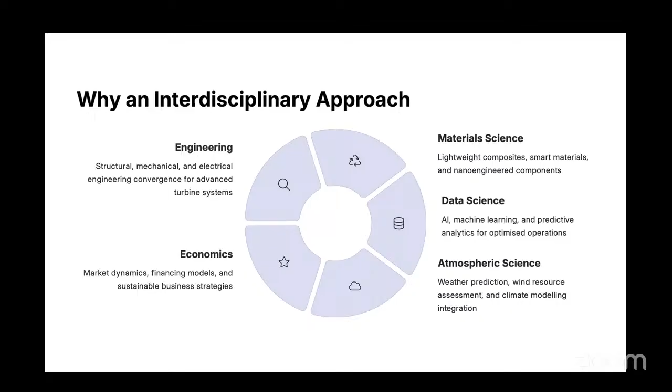What are the key challenges we are facing in wind technology? Even as wind energy scales, challenges remain. First, intermittency: wind does not blow consistently, creating stability issues for grids. Advanced forecasting is required, and storage systems are required to smooth the variability.

Second is material degradation. Blades face fatigue, erosion, and corrosion, leading to higher maintenance costs and downtime. Extending blade lifespan is essential for cost effectiveness. Third is grid integration, which becomes complex as wind penetration rises. Managing frequency, voltage, and balancing requires smarter electronics and system design.

The fourth is environmental impact, which persists, including bird strikes, noise, and visual effects. Mitigating measures such as smart siting and shutdown-on-demand radar systems are emerging. Finally, economic variability: while costs have fallen, capital intensity and financing remain hurdles, especially in developing markets.

Examples include California, where curtailment of renewables due to grid limitations is significant, and the North Sea, where saltwater corrosion challenges turbine durability. Recognizing these issues helps frame where innovation must focus.

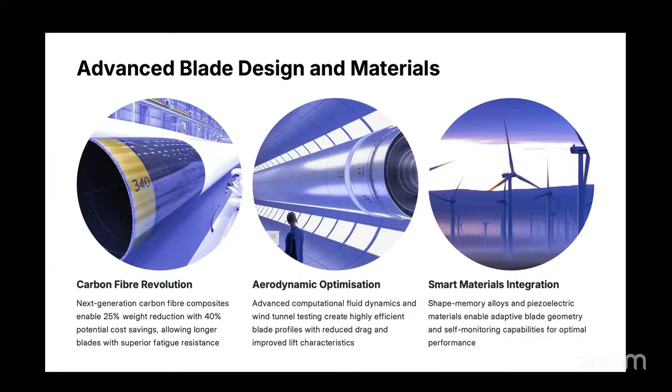And coming to smart materials, smart materials such as shape memory alloys and piezoelectrics allow the blade to adapt its geometry in real time, improving performance under variable winds. For a real world example, Siemens Gamesa is using recyclable blades which integrate advanced resins for sustainability, while General Electric's Haliade-X, the largest capacity wind turbine existing today, uses ultra long blades built from advanced composites.

So let's discuss carbon fiber composites and how they contribute to our wind turbine. Carbon fiber represents a revolution in blade technology because it makes wind turbine blades lighter. Compared to traditional glass fiber, carbon fiber allows a 25% weight reduction and also 40% cost saving over the blade's life cycle. This enables a longer, stiffer blade without requiring a proportional increase in tower size.

Sandia National Lab has demonstrated that carbon fiber composites significantly improve fatigue resistance, extending blade lifespan from 20 to over 30 years. Manufacturing advancements such as resin transfer molding reduce production time by over 40%. In practice, these blades are already in use. LM Wind Power's carbon fiber blades, equipped in General Electric's Haliade-X offshore turbines, are currently among the largest in the world, producing about 12 to 14 megawatts of power.

You can imagine the scale wind power has reached today. By lowering material fatigue and reducing cost by using carbon fibers, this becomes a commercially viable project. These advancements highlight how material science directly impacts both economics and performance in the wind sector.

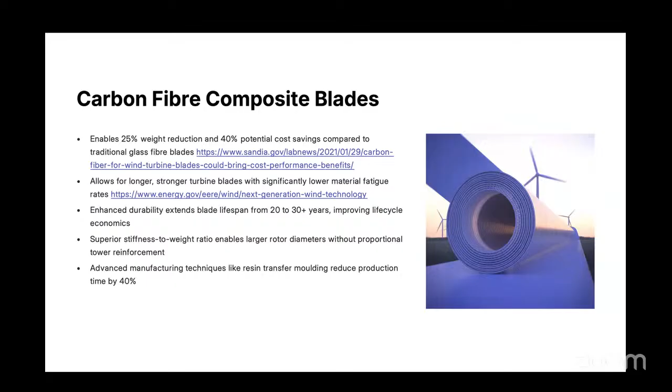So as I discussed before, biomimetic blade designs. Basically, the solution revolves around nature itself; we get inspired by nature. Nature has long been a source of inspiration for engineering. In wind energy, one example is the humpback whale flipper, a design with tubercles, bumpy ridges, which reduce drag and increase lift, and which can be applied to wind turbine blades. This design can improve power output by almost 16 to 30%. Sandia National Labs and multiple startups have tested prototypes with promising results.

And there's another concept of owl feather serrations, which are another inspiration. Owls fly silently because of fine serrations along their wings. So when applied to wind turbine blade trailing edges, these reduce noise by almost 3 to 5 decibels while maintaining aerodynamic efficiency. So Siemens Gamesa has experimented with such designs to reduce the community noise impacts.

So these nature-inspired solutions reduce the shortcomings of the wind turbine, such as noise and bird hitting, and increase the lift profile of the turbine blades. So another nature-inspired design is maple seed geometry, where the seed spins and auto-rotates as it falls. This has inspired small turbine designs with improved startups in low wind conditions, which is called the cut-in speed. And this could also help microgrid and distributed energy applications.

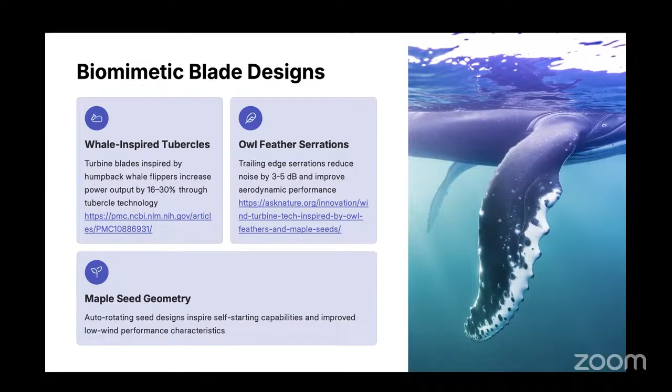Coming to vertical axis wind turbines. So vertical axis wind turbines, once sidelined, are regaining attention. Unlike horizontal axis wind turbines, vertical axis wind turbines capture wind from any direction, eliminating the need for a yaw mechanism and reducing the mechanical complexity. So this makes them especially suited for urban environments with turbulent wind patterns. So recent advancements have improved their efficiency.

This helical Savonius design now achieves 35% higher efficiency than older Darrieus configurations. So vertical axis wind turbines also operate more quietly and pose lower risk to bird populations. Basically the design does not include horizontally revolving blades. So this technology finds its application in urban areas where power can be generated, unlike horizontal axis wind turbines, which cannot be deployed in such areas. So this is a very simple approach which can be deployed in areas where bigger turbines cannot be deployed.

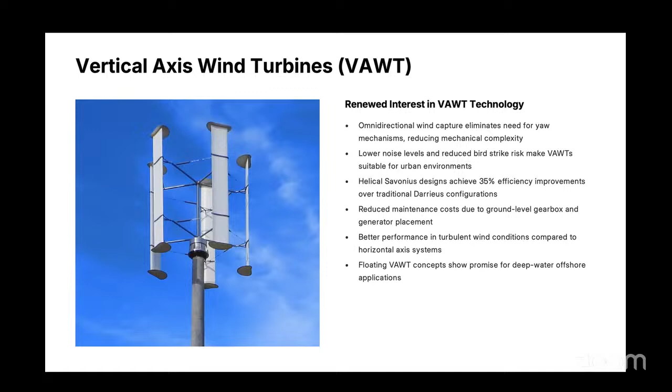Coming to floating offshore wind platforms. So offshore wind resources are immense, but many lie in water too deep for traditional fixed-bottom turbines. So floating platforms solve this challenge. We need not anchor the turbine to the bed of the sea using a concrete structure. They anchor to the bed of the sea using cables. So these are some of the floating offshore wind platforms which contribute to wind power generation. Why we are going offshore is because the wind is more powerful, stronger, and consistent in offshore regions. So this is a region we have to focus on.

So some of the semi-submersible platforms with 3-column designs are stable in harsh seas and borrow heavily from oil industry experience. Basically, the oil industries use their rigs on platforms in the sea, so they are very stable. Using that kind of approach, nowadays there are floating wind turbines, and tension leg platforms use taut mooring lines to minimize the motion. So basically, the waves are enabling the tension in the leg platform. What we are doing is moving the platform and correcting based on the tidal waves. And spar buoy concepts with deep cylindrical ballasts achieve stability through a lower center of gravity.

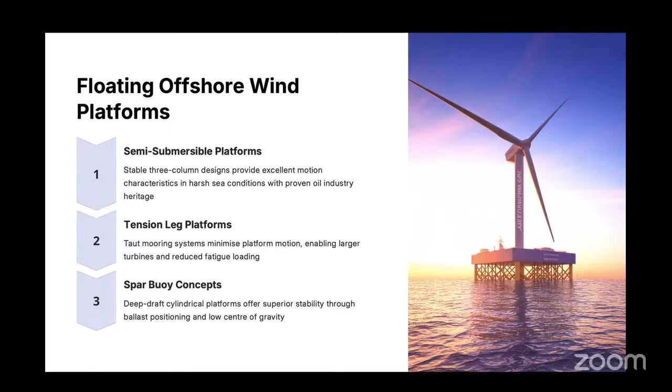So coming to a practical example, Equinor's Hywind in Scotland, the world's first floating wind farm, has been operational since 2017, delivering power to over 20,000 homes. Similarly, WindFloat Atlantic from Portugal has shown excellent performance in 100-meter deep waters.

So coming to smart turbine control systems. As turbines grow larger, smart control becomes essential for reliability and efficiency. So advanced sensors are required, which now monitor vibrations, blade stress, temperature, and wind conditions in real time. Data streams feed into the control system that optimizes the performance dynamically. And sophisticated algorithms adjust pitch, yaw, and rotational speed to maximize power capture while minimizing fatigue.

So another approach is predictive response systems, often powered by machine learning, which anticipate wind changes before they actually occur, adjusting the turbine settings proactively. For instance, General Electric's Haliade-X, which I discussed, the world's largest offshore wind turbine, also employs a sensor-rich platform that adapts pitch and yaw with remarkable precision. Similarly, Vestas is also integrating smart control algorithms to minimize structural stress while maximizing energy yields.

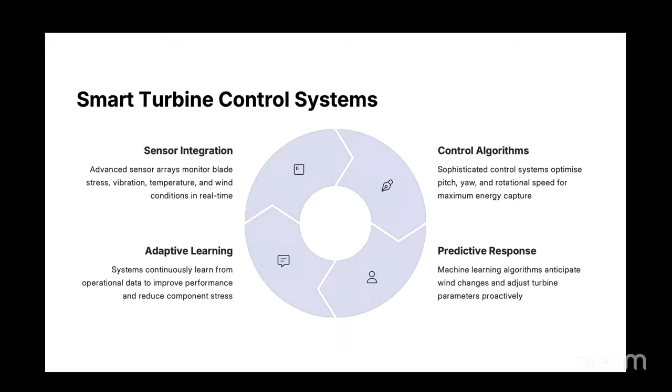So let's see the role of AI and machine learning integration in the wind power sector. Artificial intelligence is transforming wind energy. AI-driven systems improve operational efficiency by up to 20% through smarter controls. Machine learning algorithms enable predictive maintenance, cutting downtime by about 30%.

Neural networks process diverse data streams, wind speeds, vibrations, power output to continuously fine-tune the turbine performance. So deep learning models can even predict failures weeks in advance, enabling proactive repair. So we are getting a lot of data from these wind turbine sensors, and we can apply these deep learning models to even predict the faults which are yet to happen.

For example, Vestas uses an AI platform to forecast the maintenance needs across its global fleet, while Siemens Gamesa is also using AI for optimizing the blade pitch control. AI also improves forecasting accuracy, unlike the traditional approach, with energy production predictions which are now 15% more precise. In India, Tata Power has also piloted some AI systems to integrate wind forecasts with grid operation, reducing the curtailments.

So this integration turns wind farms into intelligent data-driven assets. As AI advances, it will be central not only to turbine optimization, but also to grid level management, ensuring renewable stability at scale.

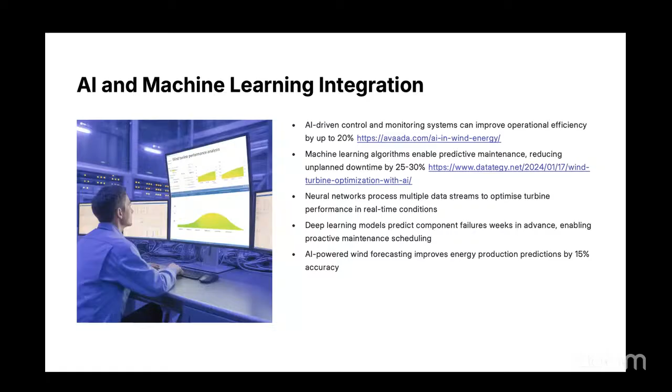Next, let's see how these predictive maintenance technologies are coming into the picture. Predictive maintenance is becoming a cornerstone of efficient wind operations. Nowadays, predictive maintenance is also getting into electric vehicles and every other equipment we see around us. There is a lot of data coming from the sensors, which is uploaded to the cloud and processed. So these AI models can predict well before the sensor or some device gets faulty. Condition monitoring systems use sensors to track vibration, temperature, and acoustics, detecting early signs of wear.

Data analytics evaluate historical trends to forecast optimal maintenance intervals, preventing costly failures. AI-optimized scheduling reduces cost by 20 to 35% while maximizing availability. Performance optimization tools extend component lifetime by identifying operational adjustments. For example, DNV GL is a company with a predictive maintenance platform, now widely used in Europe, which helps operators extend turbine availability beyond 98%.

In the US, NextEra Energy applies predictive analytics across its vast fleet to save millions annually in maintenance cost. So predictive maintenance is shifting the industry away from reactive repairs to proactive repair. Data-driven management reduces downtime, lowers cost, and ensures higher output over the turbine's lifetime.

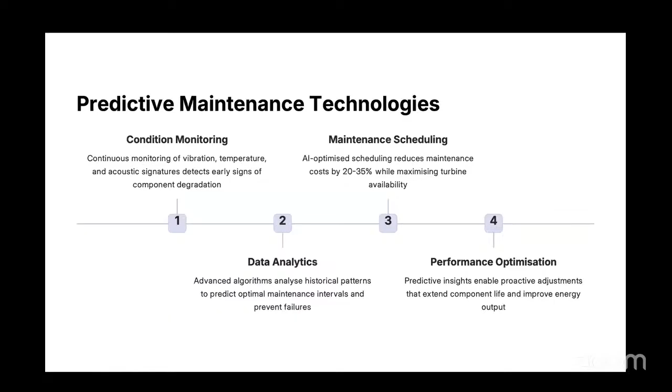Coming to advancements in power electronics. Power electronics is one of the backbones of wind turbines, which integrates them into modern grids. Wide bandgap semiconductors like silicon carbide and gallium nitride are enabling higher efficiency and compact converters. Nowadays, we have seen how compact mobile chargers have become, thanks to silicon carbide and gallium nitride based devices, wherein we are able to operate at higher switching frequency and reduce the component sizes.

Advanced converter topologies such as modular multi-level converters improve power quality and also reduce harmonics. And grid support functions, such as voltage support, frequency regulation, and fault ride-through, are increasingly embedded into the turbine electronics. For instance, Hitachi Energy and ABB are advancing SiC-based converters that reduce size as well as losses. Offshore projects in Germany have now deployed modular multi-level converters to stabilize the grid integration of large farms. These innovations ensure that as wind penetration grows, power electronics maintain grid stability while improving efficiency.

Let's now see what grid forming inverters are. Grid forming inverters are revolutionizing how renewables integrate with grids. They allow wind farms to behave like virtual synchronous generators, providing inertia and stability traditionally supplied by fossil fuel plants. Fault ride-through is a capability which ensures that turbines stay online during disturbances and improves resilience. There is one more concept, black start capability, which allows a wind farm to restart the grid after an outage. Once thought impossible for renewables, now it is possible.

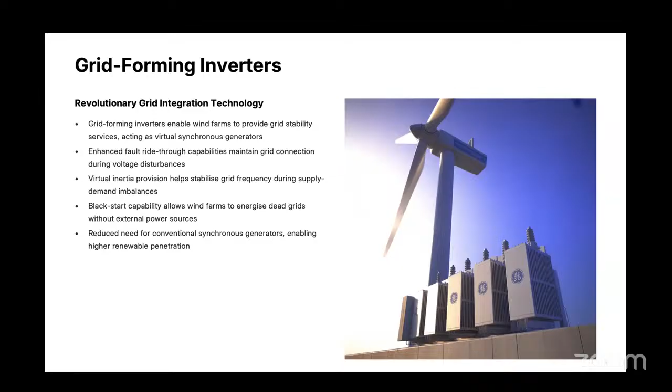Coming to modular turbine designs. Modularity simplifies turbine construction, transport, and maintenance. We'll just see how it will aid the construction, transport, and maintenance. Nowadays, the blades are segmented, so they can be assembled on the site, enabling ultra long blades without the logistic bottlenecks. We see these wind turbine blades going one after another on the highways.

You might have come across a convoy of many blades. As you see, this is a very challenging task to transport to the site. So segmented blades simplify the assembly, which can be done on the site itself. Next is prefabricated tower sections, which also reduce crane requirements and accelerate the installations.

Another segment which will aid this construction is modular drive trains, which allow for rapid replacement and upgrade during the turbine life cycle. So these are the three sectors which enable us to develop the wind turbine at the site itself.

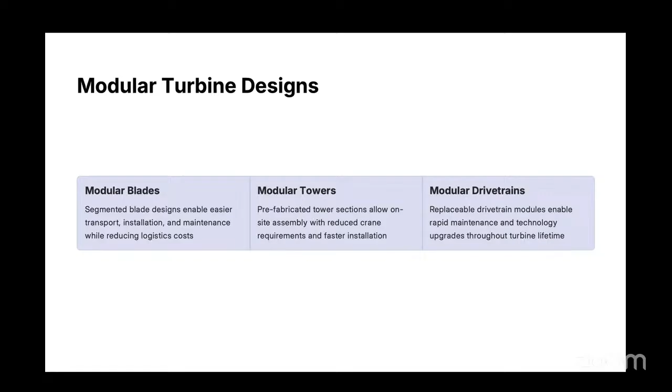Coming to ultra high capacity turbines, as I said, the turbines are reaching the tens of megawatt range. Modular turbines simplify turbine construction, transport, and maintenance, as I discussed earlier, and are able to achieve multi-megawatt capacity. Turbines are now reaching unprecedented scale. Current leaders include General Electric's Haliade-X and Vestas V236, which are rated for above 15 megawatt. You can imagine one turbine generating 15 megawatt of capacity.

This in turn gives us a cost advantage as well as powering many homes using a single turbine. These next generation prototypes are targeting about 20 megawatt with rotor diameters exceeding 280 meters. These turbines reduce cost per megawatt by nearly 50% as fewer units are needed to achieve large scale capacity. For example, a single Vestas V236 can power 20,000 European homes annually.

Offshore wind farms like Dogger Bank in the UK are deploying around 13 to 15 megawatt turbines, making it the world's largest offshore project. Scaling capacity is not just about size; it requires stronger materials, advanced logistics, and grid readiness. But ultra high capacity turbines are set to define the offshore future, lowering cost and maximizing power density.

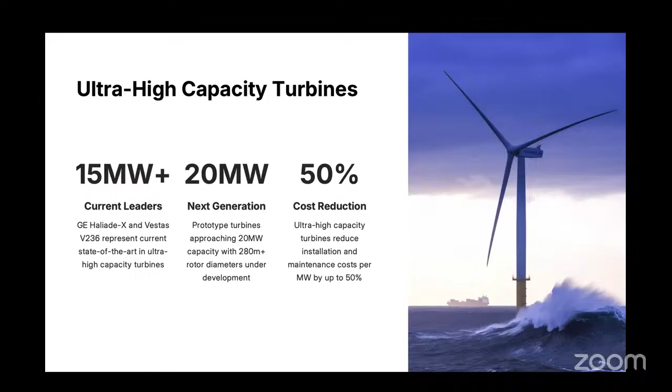High strength alloys like ultra tough steel and titanium composites are increasingly used in towers and drive trains to withstand harsh offshore environments. As I said, the opportunity offshore is huge because the wind speed is consistent and a lot stronger than onshore. So we need high strength alloys for fatigue resistance and carbon fiber blades to achieve more power output in offshore turbines.

And as you know, maintenance of offshore turbines is very difficult, so we have to choose materials which will last longer. Coming to smart materials, including shape memory alloys and self-healing polymers, which are cutting edge and under development. These can automatically adjust the structures or repair micro cracks, reducing downtime.

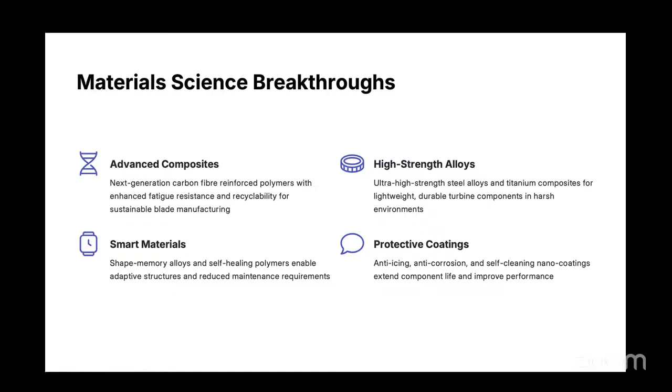Coming to aerodynamics and fluid dynamics advancements. Aerodynamics contributes a lot to power conversion efficiency. Aerodynamic research delivers higher efficiency and reduces fatigue. Large eddy simulation, a kind of model, provides detailed insight into turbulence around the rotor. Improvements in blade element momentum theory also increase performance prediction accuracy by up to 15%. Wake interaction modeling enables optimal wind farm layouts, boosting energy capture by almost 8 to 10%.

Wake interaction is nothing but the trail, you can say the shadow, of the wind turbine. When the wind crosses the wind turbine, it undergoes turbulence, and there is a fixed length of rotor diameters after which another turbine can be installed either behind it or on the crosswind. Optimizing this wake interaction will increase efficiency, and we can optimally lay out the installation of wind turbines on a wind farm.

So to maximize the output. And unsteady aerodynamic research, which will uncover how gusts and turbulence impact blade fatigue and noise. Bio-inspired flow control, such as micro vortex generators, which also reduces the drag and improves the lift.

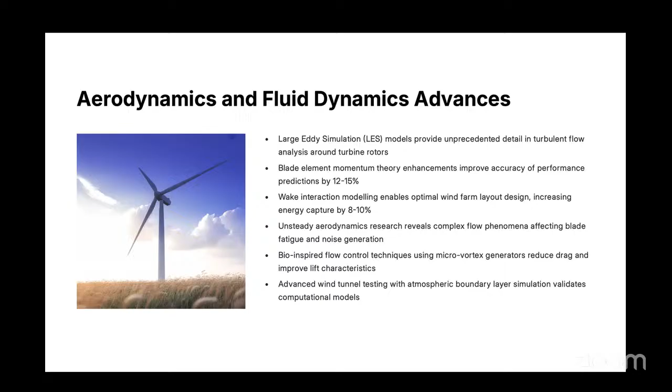Coming to structural engineering innovations. Structural engineering is very critical as turbines grow larger and larger. Advanced foundation systems like suction and gravity based designs are being developed to suit varied seabeds. So these are very important and very crucial for the offshore turbines. And dynamic response control, including tuned mass dampers and active systems, which reduces the vibration in the towers.

Next is load mitigation strategies, such as individual blade pitch control, which will cut extreme loads by up to 20%, and structural health monitoring, which will have embedded sensors which track the stresses on the blades and structure in real time. So, for example, offshore wind farms in the UK are now employing suction foundations for rapid installation. And as I told, General Electric's Haliade-X, which is the world's largest capacity wind turbine, integrates individual pitch control to reduce the stress on the blade.

So traditionally, we used to have pitch control on all of the three blades by equal amount. So by having individual control over each blade, we can optimize the power output better and be resilient to wind gusts. So these innovations extend lifetime, reduce the cost and improve the safety while ensuring turbines remain resilient under extreme conditions.

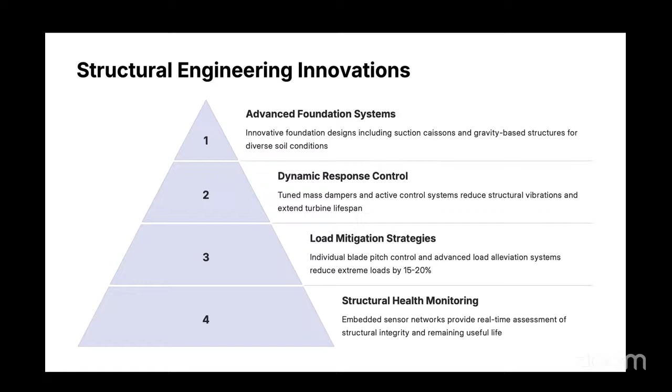Next is digital twin technologies. What do you mean by digital twin technologies? This is nothing but a virtual model which is developed inside the laboratory to evaluate how a wind turbine will perform in the targeted environment. So digital twins are reshaping wind energy operations. So a digital twin is a virtual model which updates in real time with sensor data.

So high fidelity simulations predict performance under varying conditions, and predictive analysis forecasts failures before they actually occur and optimizes the maintenance schedule. Virtual testing also allows operators to trial control strategies without physical prototypes. So, for example, Siemens Gamesa uses digital twins for fleet-wide monitoring, while NREL, which I quoted before, also developed physics-informed twins to analyze the structural fatigue. So, digital twins enhance lifecycle management, cutting cost and maximizing the uptime. They turn turbines into continuously optimized assets.

Let's just see how IoT and sensor integration benefit the wind turbine technology. So wind turbines now act as an Internet of Things. So basically, it is equipped with a lot of sensors and also internet. So a lot of AI models can make use of this data on the go and optimize the technology. So this sensor integration also uses distributed sensor networks, which can monitor vibrations, temperatures, and strain, and also environmental conditions. So edge computing processes data locally, enabling fast decision making, and cloud analytics provide fleet-wide insights and optimizations.

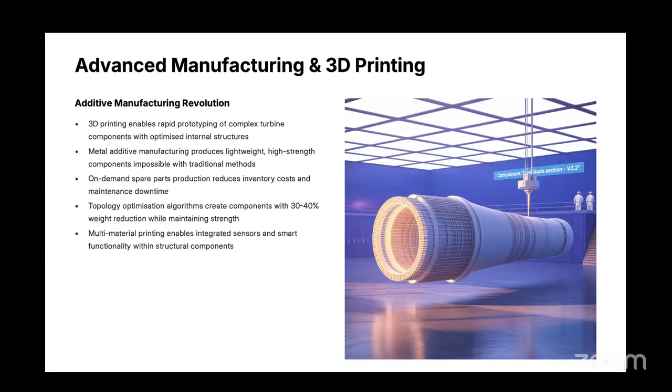Let's see what is the application of nanotechnology in the wind turbine industry. Nanotechnology enhances strength, efficiency, and resilience.

For offshore turbines, we use coatings which reduce icing and formation of corrosion. Nanocomposite materials like carbon nanotube reinforced polymers provide exceptional strength to weight ratios for the blades.

Nanostructured coating reduces ice, prevents erosion and corrosion, and provides self-cleaning surfaces. Once coated with nanostructured coating, it becomes very easy to clean these turbines offshore.

Energy harvesting nanostructures such as piezoelectric materials convert vibration into power for sensors, which is being tested and deployed in offshore applications.

As a case example, researchers at Fraunhofer Institute are also testing nano coatings that reduce blade icing and load in cold climates. Such innovations ensure turbines remain efficient even under harsh weather.

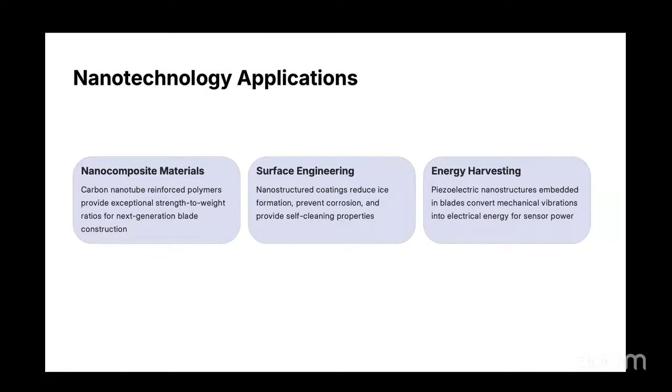Nanotechnology bridges material science and performance, unlocking new frontiers in durability.

Now let's discuss acoustic engineering solutions. Noise is a significant community concern in the wind turbine industry. Advanced acoustic measurements identify the sources of aerodynamic and mechanical noise, and acoustic designs such as serrated trailing edges reduce noise by 3 to 5 decibels.

Nature-inspired designs are also being tested, which reduce the noise level coming out of the wind turbine. Active noise control systems adaptively cancel unwanted sound, just like the true wireless headsets we use, which cancel noise.

For instance, Siemens Gamesa is using trailing edge serrations to cut blade noise, while researchers in Germany are piloting active noise cancellation for smaller turbines.

Reducing noise makes turbines more acceptable near these communities, supporting wider adoption.

Noise is also a concern in installations because wind turbines produce a lot of noise. If a community is in the vicinity of these wind turbine farms, it is very disturbing to them. So one sector where work is happening is acoustic engineering to mitigate these noises.

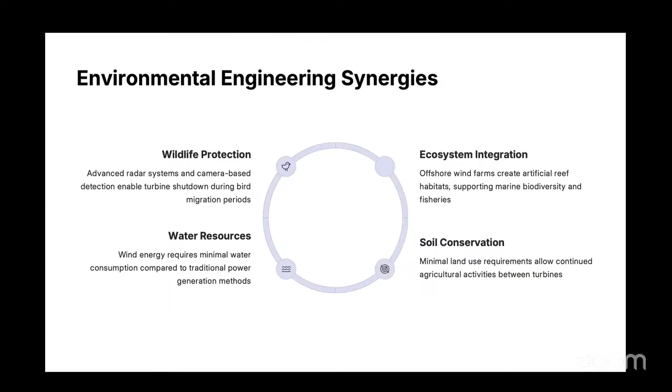Let's see how atmospheric science integrates into the development of wind turbines. Atmospheric science improves forecasting and performance.

High resolution weather models now achieve 95% accuracy for 24-hour forecasts. Mesoscale models provide resource assessment at 1 kilometer resolution, and LiDAR technology profiles wind up to 200 meters in height, optimizing control, and boundary layer research informs wind farm layouts to minimize turbulent losses.

For a real world example, offshore farms in the North Sea rely on LiDAR for accurate forecasting in turbine alignment. Integrating atmospheric science ensures turbines operate at maximum efficiency while reducing grid uncertainties.

Let's see how data analytics and big data come into the picture. AI is also contributing more nowadays in terms of prediction and optimization of power output from wind turbines, and the Internet of Things is enabling this big move in the industry.

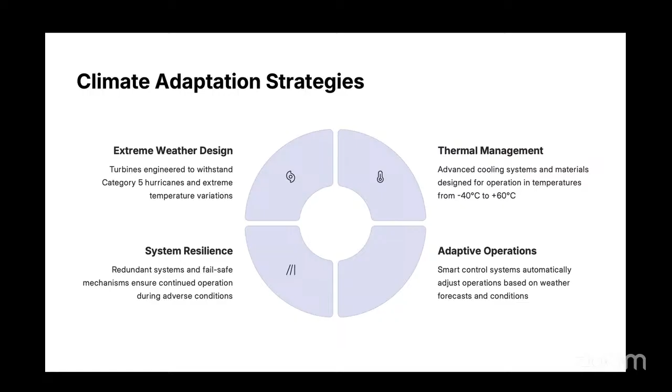Let's discuss extreme weather resilience. Resilience strategies are increasingly embedded in turbine designs. Pre-storm preparations: systems automate protective measures 48 to 78 hours in advance. Next is storm survival mode, which locks the rotor and adjusts structure to reduce damage. Typically a wind turbine locks its rotor and reduces the lift produced by the blades by adjusting its pitch.

Next is the post-storm recovery system, which uses drones and sensors for rapid condition assessments and damage mitigation through advanced materials, reducing repair costs. In Japan, typhoon-resistant turbines are being piloted with reinforced blades and towers. Offshore, companies like Equinor integrate storm survival protocols into floating platforms. These measures reduce downtime, cut repair costs, and protect infrastructure. Extreme weather is inevitable; we cannot control the weather at all, but resilience ensures continued operation throughout.

Let's see how wind resource mapping affects wind turbine technology. Accurate resource mapping is the foundation of wind turbine projects. Satellite-based measurement provides global data sets with about 1 kilometer resolution. Ground-based LiDAR systems capture local wind up to 300 meters. Nowadays, machine learning models combine these data sets for better prediction accuracy, with high resolution modeling accounting for terrain and micro scale patterns. For example, India's National Institute of Wind Energy has developed wind atlases to guide project sitings. Similarly, the Global Wind Atlas, developed by the World Bank, provides open access data worldwide. Advanced mapping reduces investment risk, ensures optimal siting, and maximizes project yields.

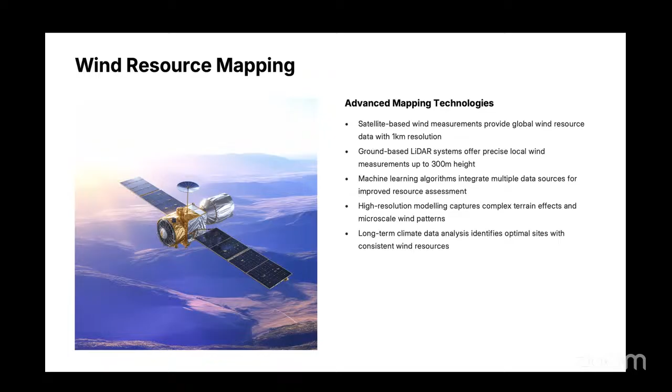So let's see how we can integrate this weather forecast. Weather forecasting is integral to wind turbine operation. Real-time data ingestion, combined with satellites, radars, and ground stations. Ensemble forecasting uses multiple models to provide probabilistic predictions. Power production forecasting converts weather data into expected generation.

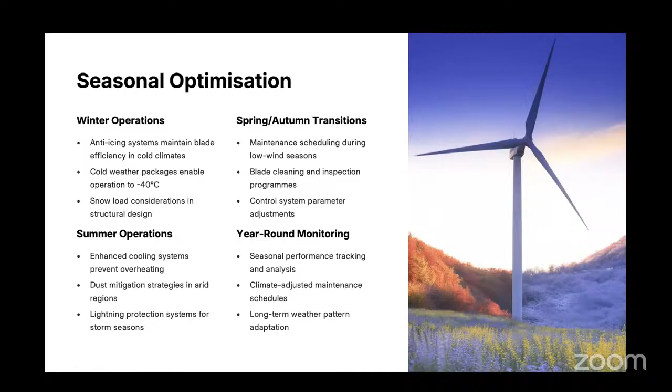Let's see how multi-hazard design works in wind infrastructure. Wind turbines must withstand multiple hazards. Seismic resistance is achieved by base isolation and flexible foundations, and hurricane survivability relies on aerodynamic reinforcement. As I said, a variable pitch system is used for individual blades. Coming to flood resilience, which involves elevating electrical components and sealing enclosures.

For example, Japan has higher seismic activity, so their offshore projects integrate seismic and typhoon resilience, while in the US, Gulf Coast turbines are designed for storm surge protection. So multi-hazard designs ensure these turbines are safe and reliable even in high-risk regions.

Let's see infrastructure hardening. Hardening infrastructure improves resilience and safety. This includes enhanced foundations, like deep caisson, which provide stability in extreme seas, reinforced towers with high-strength steel, which reduce fatigue and vibrations, protected electronics that resist electromagnetic pulses and surges, and backup systems that provide emergency power and communication.

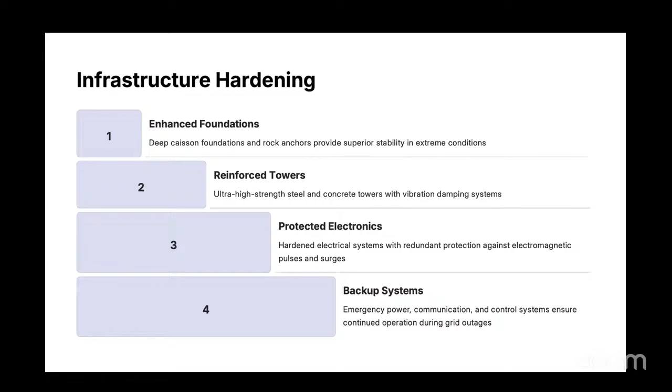Let's see what the emergency response systems would be if a hazard or event is detected. Emergency response capabilities are critical for modern wind farms, including automated shutdown systems that can stop the turbine within seconds when dangerous conditions are detected, and emergency communication networks that maintain connectivity during disasters, ensuring coordination with grid operators and local services.

Drone-based assessment can quickly survey wind turbine conditions after storms, reducing the time and risk of manual inspection. Drone-based approaches are taking off very quickly nowadays. Even blade inspection and crack detection in towers are done through drones, unlike manual assessment. Next is remote monitoring platforms, which enable off-site management during a crisis.

For example, Ørsted is a company that integrates drones into inspection across its offshore portfolio, and also uses real-time monitoring centers in Spain to manage these emergency events. With climate risk rising, emergency response systems also protect these assets, safeguard personnel, and enable rapid recovery of these systems.

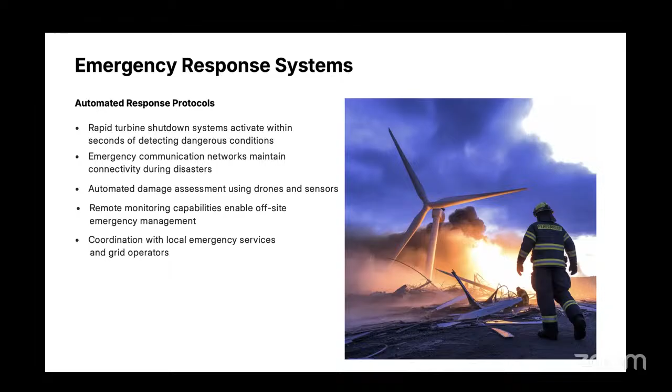Let's see how we can integrate climate modeling into wind turbine technology. Wind planning is increasingly integrated into global and regional climate models. IPCC scenarios guide long-term energy planning. IPCC is the Intergovernmental Panel, an international body which guides how long-term energy can be planned.

Next is regional downscaling, which produces site-specific projections for wind speeds and weather extremes. Next is extreme event analysis, which identifies risks like stronger storms and drought conditions. Next, uncertainty quantification, which ensures resilience even under multiple climate futures. For example, European utilities now use downscaled models to assess offshore wind viability under future climate conditions. Integrating such insights ensures investments remain robust across decades.

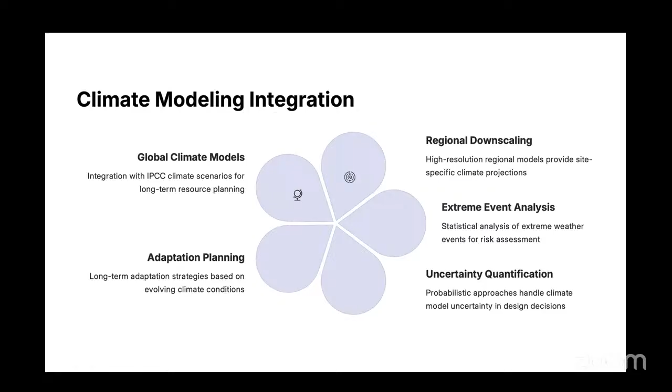So let's just see what is the risk assessment framework in wind turbines. Risk assessment ensures projects account for hazards and vulnerabilities of the wind turbines. The first step is hazard identification, which catalogs threats like storms, floods, and seismic events. Next is vulnerability assessment, which analyzes turbine and system weaknesses.

Next is probabilistic quantification, which combines hazard frequency with consequence severity, and mitigation strategies, which develop cost-effective countermeasures. For instance, offshore projects in Japan now employ seismic risk modeling before foundation design starts. So these frameworks ensure that developers make informed choices and minimize financial and operational risks.

Let's just see what the adaptation pathways are. Adaptation is not a one-time action, it evolves in stages. From 2025 to 2030, there is incremental improvement, such as anti-icing coatings, modular repairs, and better forecasting of wind data. In the 2030 to 2040 decade, we'll see deployment of advanced materials, predictive maintenance systems, and integrated hybrid renewables.

And in the following decade, 2040 to 2050, we'll see fully climate-adapted systems with revolutionary technologies like recyclable turbines and autonomous wind farms. For example, Denmark's energy agency has already mapped adaptation strategies through 2050, linking its innovation policies. So adaptation is a pathway which ensures resilience that keeps pace with climate change.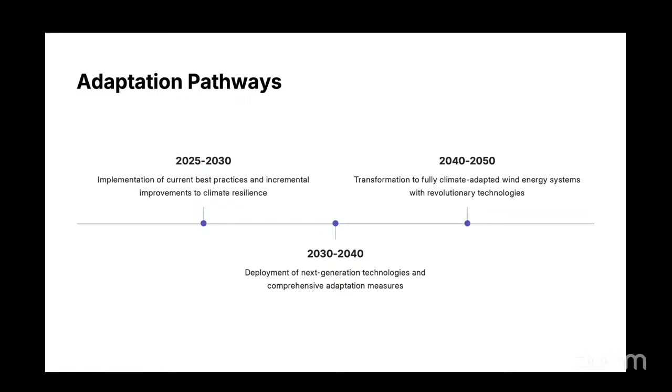Let's just see how we can integrate into a smart grid. Wind energy is increasingly supporting smart grids. Advanced metering enables real-time monitoring and demand management, and demand response systems balance supply and consumption dynamically. Next is grid services, such as voltage support and spinning reserves, which come directly from the wind farms themselves. Next is predictive control, which integrates forecasts into grid dispatch.

Denmark is a global leader. Wind regularly supplies more than 50% of its electricity while maintaining grid stability through smart integration. So this slide demonstrates how wind is not just energy generation, but an active grid participant.

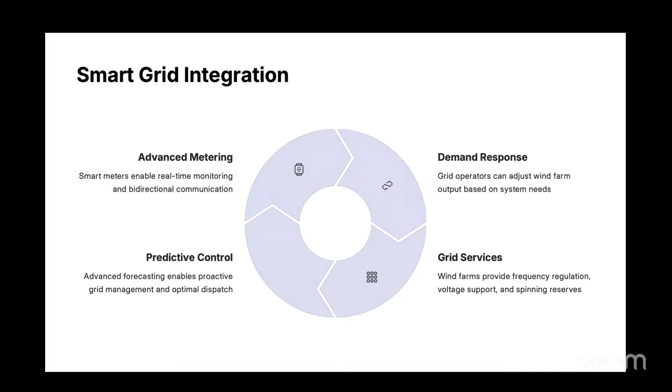Now we'll see the application in microgrids. Wind also powers resilient microgrids. Community microgrids provide local energy and security. These community microgrids are nothing but smaller turbines installed, let's say, in urban areas. Next, island nations like Hawaii and Mauritius reduce dependence on diesel with wind and solar storage systems. By integrating storage systems and using wind turbines, we can mitigate the diesel-powered generators which provide energy to the island nations.

Next are industrial facilities, which use microgrids to cut costs and boost reliability. Then military bases, which adopt wind-powered microgrids for operational independence. Nowadays, airborne wind turbines are also coming, which have no structures; they are kite-based wind turbines. They can be portable and can be deployed in places where wind energy is not accessible and installation is very difficult.

A real-world example: the Kodiak Islands in Alaska run largely on wind-hydro microgrids, reducing diesel imports dramatically. Microgrids highlight how wind energy supports both sustainability and resilience.

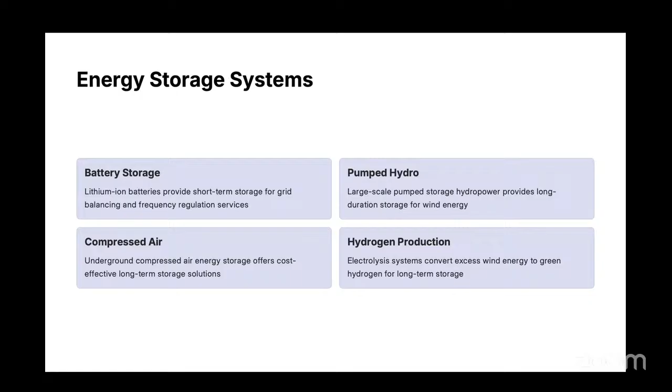And then there is green hydrogen, which enables seasonal storage and sector coupling. We convert water into hydrogen gas, store it, and convert it into electricity whenever it is needed. There is a European company developing a project which demonstrates wind-to-hydrogen at scale. And Hornsdale in Australia couples wind with Tesla batteries, as I discussed, for frequency stability. So storage ensures wind energy is firm and dispatchable, ready for 24/7 supply.

Let's see how grid stability solutions can be coming from wind technologies. Grid stability is essential as renewables expand, and frequency regulation is one of the main important components. In India, we have a one grid, one nation policy, wherein we have one grid which swings together. So frequency regulation is very important, which uses advanced inverters to provide synthetic inertia, and voltage support, which comes through reactive power control, and black start capability, which allows a farm to restart dead grids.

Hornsdale Power Reserve in Australia has shown how a renewable plus storage system can provide these grid services faster and more effectively than fossil plants. Even the fossil plants require a time period to start and supply power. So by having a wind turbine with a storage solution, we can start the grid instantly by using cutting edge technologies. So grid stability solutions redefine renewables from variable suppliers to grid stabilizers.

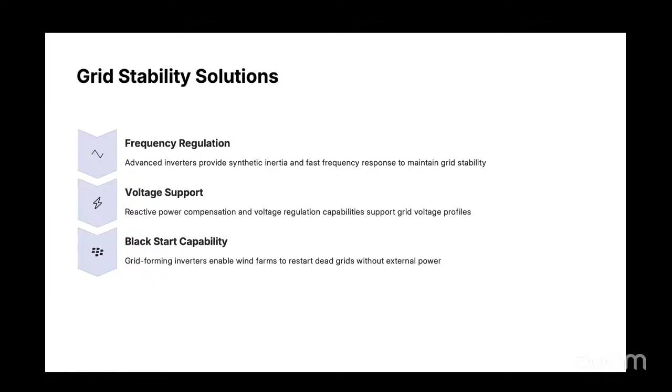Next, we'll come to hybrid renewable systems. Hybrid systems combine complementary resources. So we combine some other renewable with the wind energy system so that our system is more reliable. The primary combination is the wind and solar hybrid, which ensures continuous supply as the sun and wind peak at different times. When the sun shines stronger, we'll store that energy, and we also combine it with wind energy, which can be accessed throughout the day with variability. We combine these two technologies and integrate them with a battery for smoothing out these fluctuations. So battery integration is very essential.

Next is the backup generator, which adds redundancy. In case we don't get wind power, then we have a redundancy, which is a backup generator. In India's Gujarat, the hybrid park is a landmark, integrating 30 gigawatts of wind and solar with storage in one location. Such projects maximize land use, lower the cost, and deliver reliable and clean power.

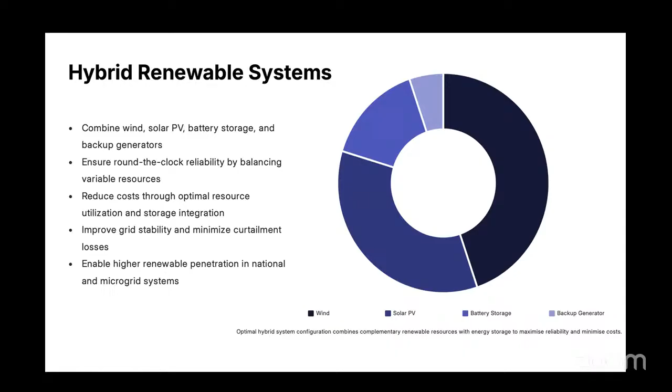Next we will see the key findings of this presentation, the future directions, and key takeaways. So we conclude this with some key takeaways. Technology readiness: next generation wind technology already shows 20 to 40% performance gains, with commercial deployment expected in this decade. Next is climate adaptation. Turbines are being engineered for extreme weather to ensure resilience. Next is system integration. Wind is evolving into a cornerstone of smart grids, hybrid systems and the circular economy, with recyclable blades and sustainable materials, which will address end of life cycle challenges.

Most importantly, interdisciplinary innovation is the main engine behind this progress, combining engineering, science, and economics to make wind energy climate smart, climate resilient and sustainable. Projects like Dogger Bank in the UK, Hywind in Scotland and Hornsdale in Australia illustrate the future is already here. The task ahead is to accelerate, scale up, and adapt.

By combining AI tech in the industry, we can forecast the wind better, which ensures better energy production, and advancements in aerodynamics ensure aerodynamic efficiency and resilience to hurricanes and extreme wind conditions, which also increases the lifespan of wind turbines so they become climate ready.

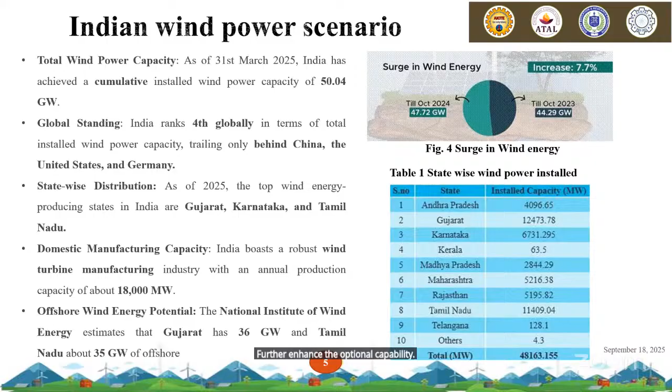Now this is the data. Now coming to why grid integration is important. Initially, we are having the capacity to generate like 50 gigawatt and everything from wind itself, and we are harnessing wind energy, so in order to properly utilize this, we have to integrate it to the grid, because from the traditional approach, grid is a medium through which we used to get energy. Hence, grid integration is very much essential with large scale generation of anything like solar, wind, hydro.

But with grid integration, there come a lot of variabilities also, like the technical aspect is there, the economic aspect is there, regulatory practices are there. So multiple types of sources can coexist, because conventional has a different nature, wind has a different nature, solar has a different nature, and we have the grid as a combined medium which integrates all these variabilities into it and supplies us power in a very reliable and efficient way. Hence, a lot of technicalities and regulations are there.

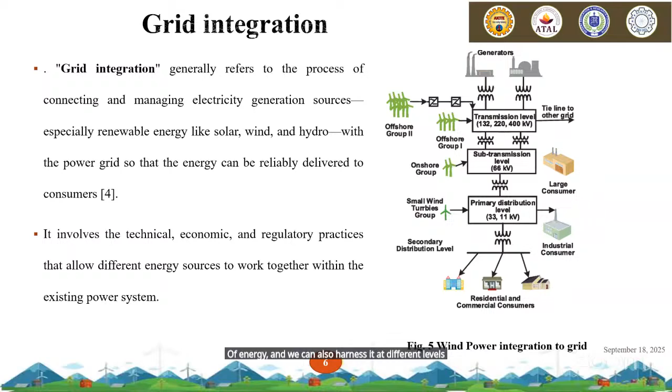From this diagram, we can see that nowadays we are capable of integrating wind energy at any level. If we are having an offshore group, we can integrate wind energy at transmission level. An onshore group could be incorporated at sub transmission level. And as decentralization is in progress, we can also incorporate a small turbine group at primary distribution level. Hence, wind energy has got a huge aspect in this grid integration. We have to look into everything because of the huge potential of energy, and we can also harness it at different levels subject to our requirement and subject to the development also.

Now comes why this integration is important. This integration is important not only to follow the rules, but also to have optimal use of these renewables. Without proper integration, if you're generating in excess amount and you want to sell it, for selling you want to come to the medium which will further sell it to the consumers. So you have to integrate it to that medium, and hence grid integration is very much essential for optimal use of renewables, and for earning, for having economic efficiencies.

Now when it comes to grid integration, we must talk about the stability in the system, because everybody is having a different nature. For a system to coexist, they must follow certain rules to have stability. We must have some balancing. So for that, maintaining power quality and stability is essential. When we are going for grid integration, by incorporating the technical issues, we try to have this power quality and stability management. From there we maintain frequency, voltage, LVRT and other stabilities.

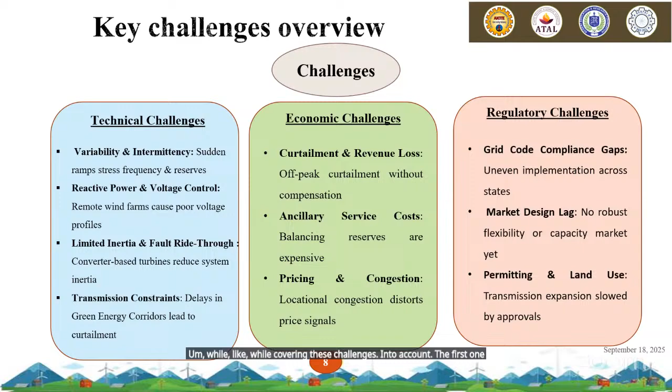The first one is variability and intermittency. Variability, as the name suggests, is basically the natural fluctuation of renewables over time. However, intermittency is a different term. People use it as a synonym, but they have different meanings.

Variability is the natural fluctuation, and intermittency is when the resource is not available. We cannot say not available in case of wind; that is not enough to have generation. So that is intermittency. So variability and intermittency are the inherent property of any renewable source, and with wind

also it is there. And because of this variability and intermittency, when coming to the grid aspect, we are seeing that there is a gap between supply and demand, and this has to be matched every second. And this variability and intermittency is a bit unpredictable, predictable to some extent, but always there is some slight error. So because of this, it affects this balance, which is a must-have in a grid. And since this is unpredictable, variable output most of the time overloads or underuses the transmission line, making it congested.

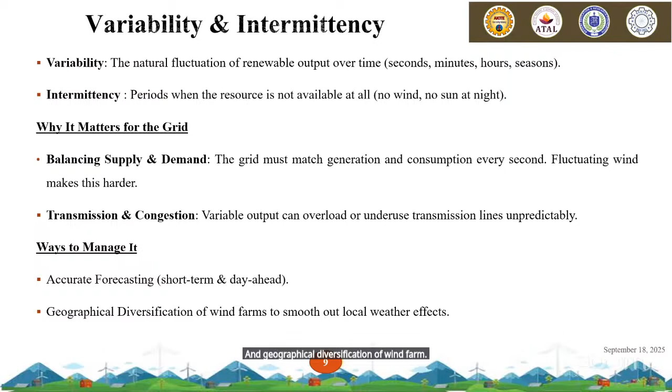Next, this variability and intermittency can be handled by accurate forecasting and geographical diversification of wind farms to cancel out local weather effects. Now, when I'm talking about forecasting, we need to know for what reason we want what kind of forecast. Forecasting is done basically for a certain time scale and usability. If we are talking about real-time dispatch, we have to go for a 5 to 60 minute time scale. The forecasting should be accurate for 5 to 60 minutes. And if you're going for hour-ahead scheduling, then we could make this time horizon 1 to 6 hours ahead.

And for planning, we do have unit commitment or market trading. For economic dispatch, the forecasting is for day-ahead time; the time horizon is day ahead. And for resource planning or contingency, this time horizon is long, because if you want to have any kind of new installation, you have to plan everything ahead. So for resource planning, we always go for long-term planning.

And now when we are talking about forecasting, apart from time horizon, we have different approaches also. Nowadays, AI and ML based approaches are also there. But going by this, we have the deterministic approach, which nowadays is becoming redundant. Now we are analyzing everything with uncertainty, and with uncertainty we have a probabilistic approach, a risk index, and a scenario-based approach to predict wind. These are some approaches, and nowadays a lot of efficient approaches based on AI and ML are also used for forecasting.

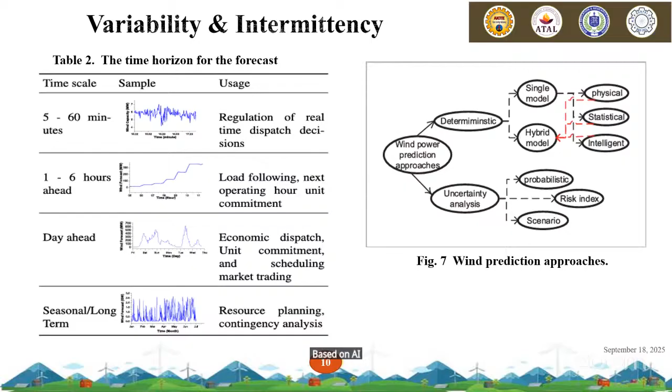The second very important thing for grid integration is reactive power and voltage support. Basically, these are stability-related things, as voltage is a very important factor in electricity. If our voltage keeps on reducing, it will reach voltage instability, and prolonged operation under this instability may lead to blackout in the system, so proper voltage is very essential in the system.

Voltage support, with deregulation, has become very much in demand, because with deregulation nowadays everybody wants to earn money, and for that they overuse those apparatuses. With such prolonged operation, if you overuse it for more time, it hampers the stability of that system, basically the reactive power of that system. And as reactive power is strongly related to voltage support, in order to have proper voltage in a system, we have to have proper reactive power in the system.

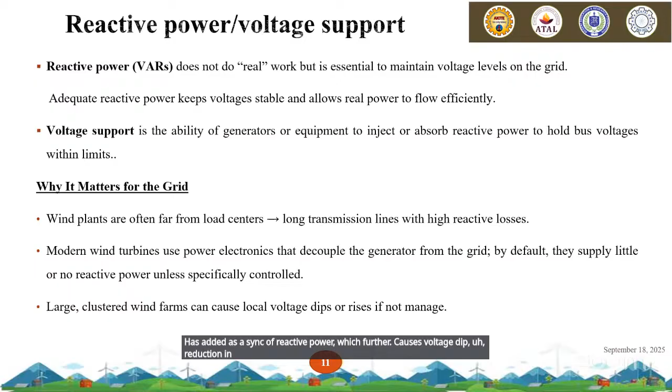Now coming to different ways to manage how reactive power could be managed in the system and how voltage support could be provided. First of all, we could go for wind turbine converters. Nowadays a lot of power electronic converters are there with wind generators, and they are capable of supplying reactive power, but they are not supplying it because they are not tuned to supply that. Research is still going on. A lot of papers are there on how this DFIG could be incorporated in a system and, in need, how it could inject as well as absorb reactive power dynamically. This allows us to use this doubly fed induction generator as a turbine-integrated STATCOM kind of device.

Further, we are having capacitor banks and shunt reactors to support reactive power at the grid side. Then STATCOM and SVC are there at the point of coupling of large integrated wind farms to provide voltage support, and the response time for this is in milliseconds, which is essential. Also, in many countries there is a grid code that the wind plant should maintain a certain power factor while injecting to the grid.

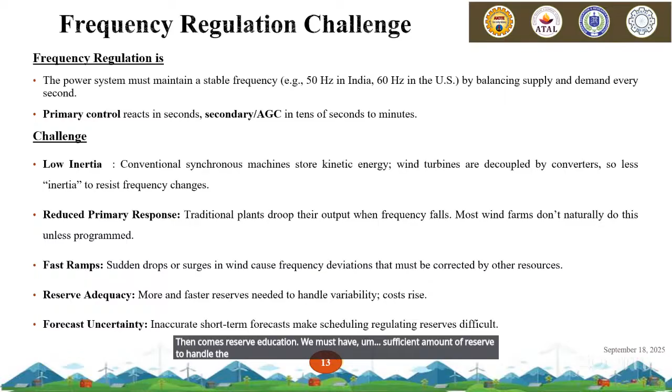Also, fast ramping: sudden drops and fast surges are there in wind that cause frequency deviation. For this, we need another device integrated in coordination with the wind to correct this ramping rate. Then comes reserve adequacy. We must have a sufficient amount of reserve to handle the variability in power and frequency.

For mitigation, we could go for synthetic inertia: program wind turbine converters to release kinetic energy during frequency drift. We can connect a flywheel or supercapacitor, which would provide synthetic inertia to the wind farm. Then we could go for fast frequency response, where battery storage or inverter-based resources provide action so the response is fast enough. We could also enhance grid codes where primary and secondary control can participate.

Proper forecasting is one. Everything could be solved if we had accurate forecasting, but accurate forecasting is a myth. We are always approaching it. And even if we forecast, we are not able to have such a versatile dynamic system. It's a big challenge, so we have to look into that also. These are some of the mitigation measures for frequency regulation.

Now comes fault ride-through. Earlier, conventionally, renewables had the ability to disconnect whenever there was a sudden voltage drop or voltage surge. However, nowadays, as renewables' share is increasing day by day, if we go for this disconnection, it will destabilize the system. Whenever there was a fault earlier, renewables used to get disconnected, but now we cannot disconnect the major shareholder from this, because this will destabilize the grid.

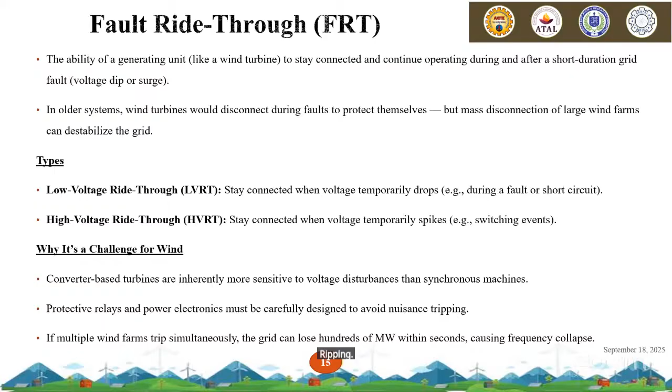How could this fault ride-through be achieved? It could be achieved by controlling the algorithm in the converter. It will limit the current and maintain reactive power injection during the fault, which will support the voltage during the fault, and hence won't allow the system to trip. Also, if we have some DC link energy storage to support during power imbalance inside the converter, this problem could also be gotten rid of.

Coordinated protection is needed so that turbines don't trip off before the grid recovers. It should give a certain amount of time to recover. From the figure, you can see that a turbine should have at least 1500 milliseconds given so that the grid recovers. This is how LVRT performs.

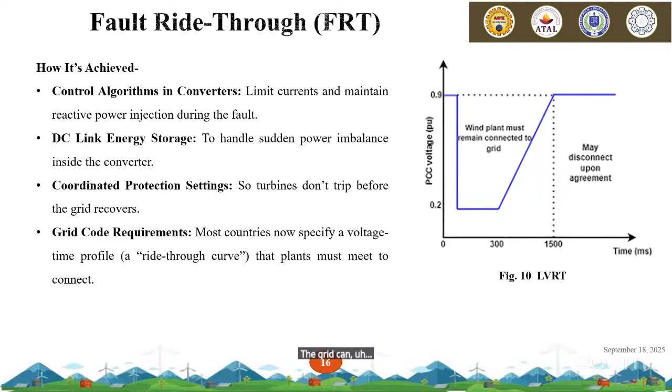We also require strict grid code with this. Every turbine should follow grid code compliance, where they should give a proper voltage-time profile so that the grid can reestablish itself and the system can operate reliably.

Now, apart from the technical constraint, there is a physical constraint also, that is transmission constraint. Since these are located at far ends, sometimes transmission lines have insufficient capacity to incorporate huge amounts of energy into it, which causes congestion. Also, the existing infrastructure is not fast enough to adapt to this decentralized renewable integration into the system, which leads to curtailment due to limited infrastructure. Sometimes with wind, we have the capacity to generate, but from the stability point of view, we are forced to curtail to eradicate this congestion, and this also causes voltage and stability issues as it travels through long distances.

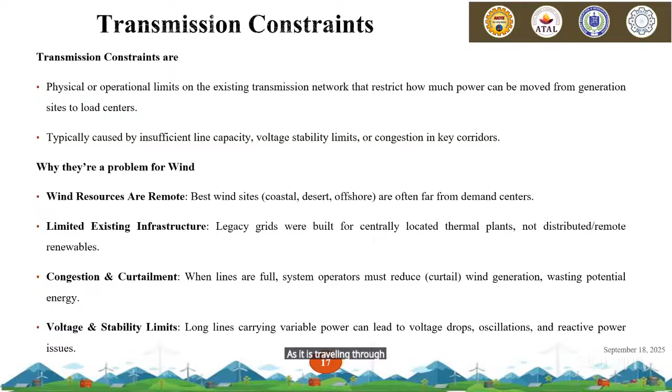This transmission constraint not only causes revenue loss but also huge transmission loss, and increased curtailments demotivate investors from investing further in upcoming renewable energy targets. So it is anyway delaying the renewable energy targets and projects.

The mitigation strategy should be to go for green energy corridors. We should build new transmission systems capable enough to incorporate this new large share of green energy coming from wind. With dynamic line rating, we could use real-time weather data to safely increase existing line capacity. We should go for upgrading substations, adding more reactive power compensating devices, and co-location of storage, so that there shouldn't be delays in transmission upgrades.

Now, what is curtailment and revenue loss? Curtailment is basically when the utility has the ability to generate power, however, from the grid management side, due to congestion or other activities, system stability related issues, the grid has decided that it won't take power from this, and hence you shouldn't generate power. This basically means we are not able to sell the power, even though we have the ability to generate it. This is basically curtailment, and it causes losses.

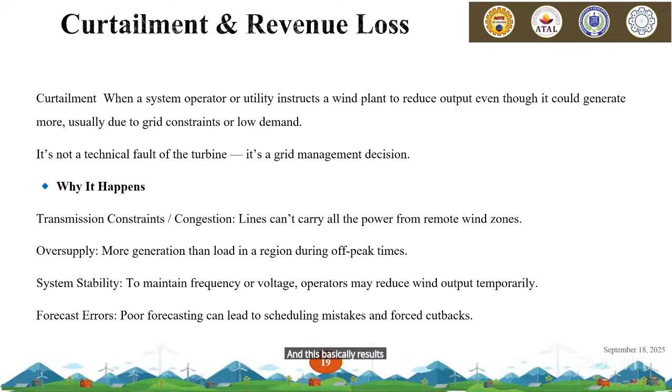Now, impact on revenue. Due to this curtailment, wind developers get paid only for the deliverable energy, not for the potential energy they are holding. So they are incurring losses. Further, this frequent curtailment reduces the capacity factor and return on investment, and there is no compensation on curtailed energy. In some countries, however, partial compensation is allowed, but still this incurs revenue loss.

This could be mitigated by better transmission planning, by having green corridors and HVDC integration. We could have an efficient transmission system which can incorporate a large share of wind, and hence it could be integrated to the grid.

Then we could go for flexible demand. If we classify demand and go for flexible demand, then whenever there is an opportunity to earn revenue, they could absorb the excess energy instead of curtailing it. This is one way to mitigate this. And obviously forecasting is a thing, it will improve forecasting and align scheduling with the actual output.

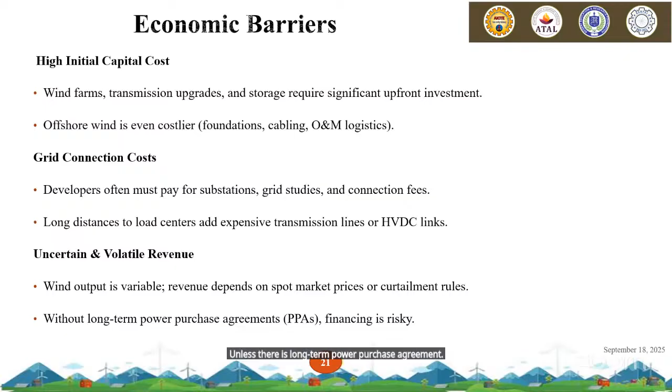Further, apart from this, there are some hidden costs with this wind power integration. These are the ancillary services, because they require proper balancing, spinning reserve, battery storage, and reactive power support. These hidden costs add to the cost of ancillary services. Hence the lenders sometimes apply higher interest rates or require a larger equity share for variable output projects, and these are some of the barriers.

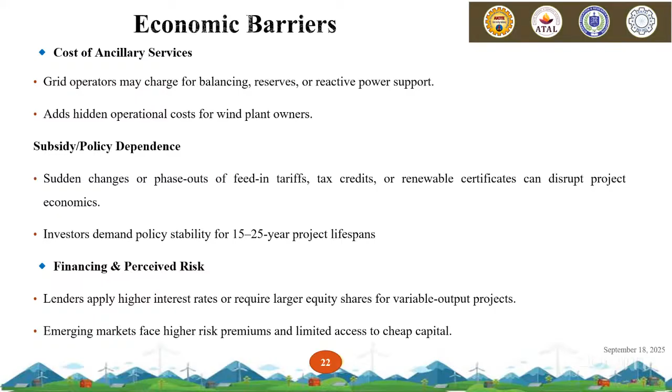These were some of the challenges. Now coming to some advanced methods, what are the emerging techniques being used to integrate wind to the grid. Till now, we have gone through the conventional challenges and the conventional way of handling them. Now comes some advanced techniques.

The first one is, since this entire grid-integrated wind energy system is based on converters, converters matter in the system. We could go for different controllers or different designs of converters, so that we can harness more and more energy in the system.

These converters in wind turbines are basically a link between the generator and the grid. They decouple the mechanical rotating part from the grid's static part, and hence allow the mechanical part to rotate at variable speed and harness maximum energy from wind.

The converter then converts this into proper voltage and frequency before it is injected into the grid. Apart from this, it also provides active and reactive power control, maintains fault ride-through, filters the harmonics, and provides synthetic inertia by momentarily releasing kinetic energy.

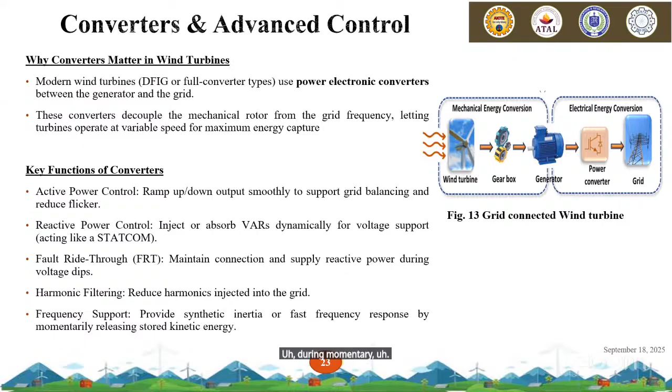Now, what are the converter innovations till now?

But nowadays grid forming converters are there. They basically set the voltage and frequency instead of just following the grid. This basically allows the wind farm to act as a virtual synchronous machine by providing inertia and voltage support. Apart from this, various converters with battery storage or supercapacitors enable ultra fast active and reactive power support.

Also, since now they are setting voltage and frequency independently, they have the ability to start the dead grid, like they have capability of black start, and it also smoothens the wind power output. Also, various modular multi-level converters are used in offshore and HVDC systems for better scalability and fault ride through.

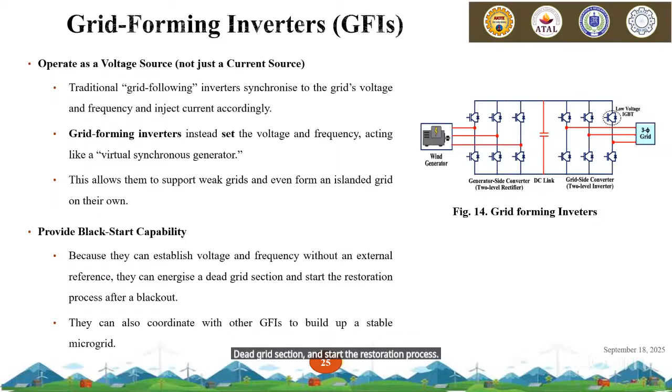And now coming to synthetic inertia. As wind penetration increases, synthetic inertia has become important for frequency stability. Whenever there is a sudden drop in frequency, synthetic inertia or inverter based resources are able to inject extra active power within a fraction of a second. This mimics the immediate energy release as from the spinning reserve and acts as synchronous machine inertia - it mimics the behavior of a synchronous generator which has inertia.

Since this is very fast and provides energy for a small amount of time, it could help momentarily, buying time so that other resources could come into picture and then support the grid. So converters are being programmed in such a way that they will provide synthetic inertia control to the wind integration. This enhances grid stability with a high share of renewables and complements the primary frequency control.

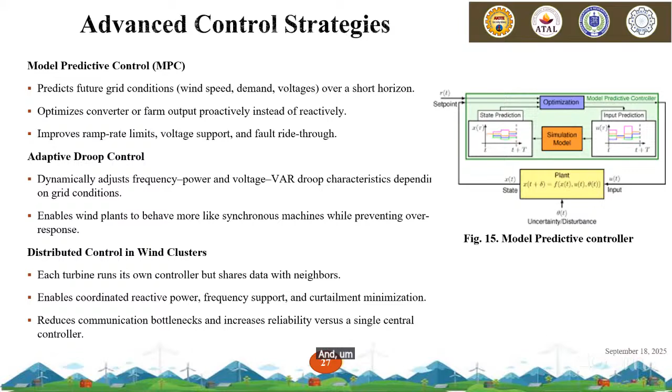Now, apart from this, there are FACTS devices for integration. As we have seen, reactive power support or proper voltage support is needed before grid integration. So for that, we have STATCOMs and SVCs in the system, integrated with the wind farm before introducing the power to the grid, so that when it is introduced to the grid, it can support the voltage and have an optimum amount of reactive power, which can stabilize weak grids.

This basically, in case of weak grids, compensates the voltage dips, maintains power factor, and damps the oscillation. It also helps the wind plant meet the grid code requirement of reactive capability and fault ride through, and reduces the risk of voltage collapse that could result in blackout.

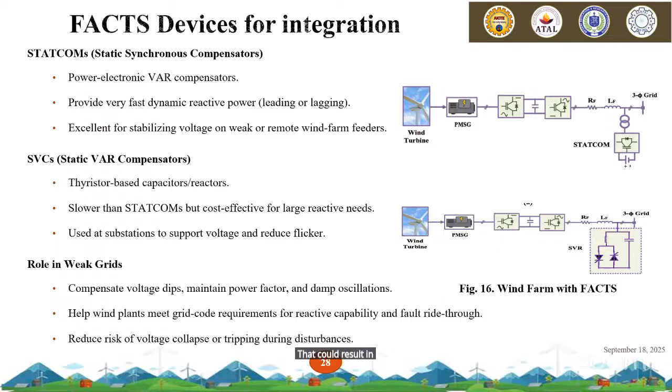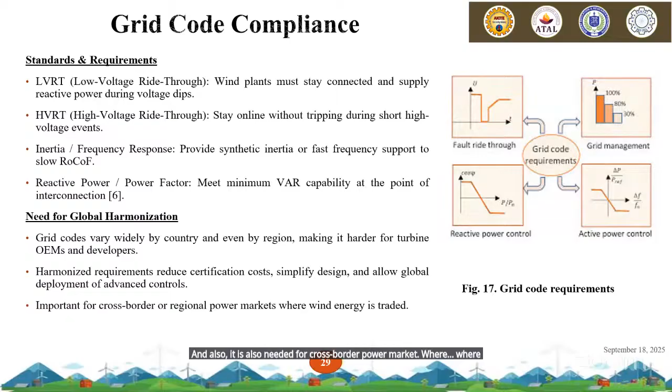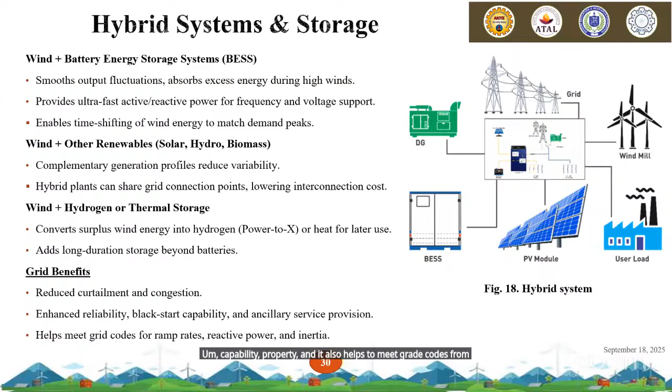Now coming to the hybrid renewable system, which is basically a wind solar hybrid plant. Wind and solar generation profiles are basically complementary. If we could find a place where we could harness an optimum amount of wind energy during night and monsoon season, and solar energy during the sunny season or during the day, then this is very apt. Combining these two reduces the ramping stress of the grid and helps to meet the grid code by predictability and ramp rates. This picture shows one example of a wind solar hybrid plant.

With this, not only are we reducing the variability, but we are also sharing the land and infrastructure cost, because now we don't need extra income to have separate wind and solar. Rather, we have clubbed them and use one transmission system to bring power from these farms to the grid, and also lower permitting and environmental impact as compared to building these two plants separately.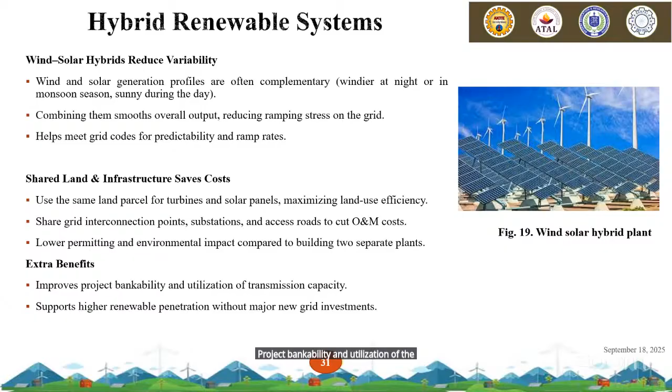Now coming to battery storage. Batteries can inject and absorb active power and reactive power in milliseconds and arrest frequency drops. It basically complements synthetic inertia and primary control.

Also with battery storage, during off-peak hours excess power could be saved and sold later. Apart from this, during congested periods also, with battery storage integration we could save the excess generation, which could be further utilized to generate revenue.

One very famous project, the Tesla Hornsdale Power Reserve in Australia, has demonstrated how large scale batteries can stabilize the grid while reducing the operating cost.

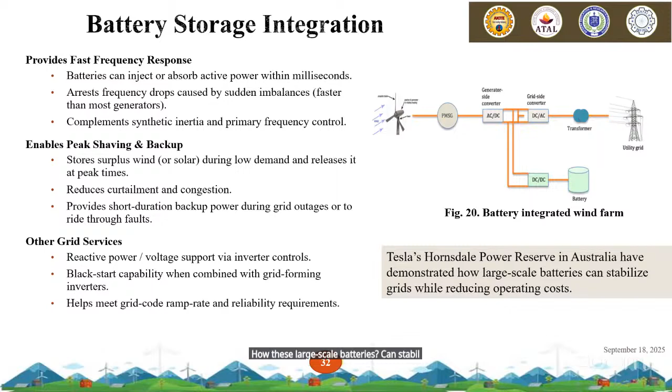Mr. Sandeep Bak, kindly mute your microphone. Requesting all the participants, kindly mute your microphone.

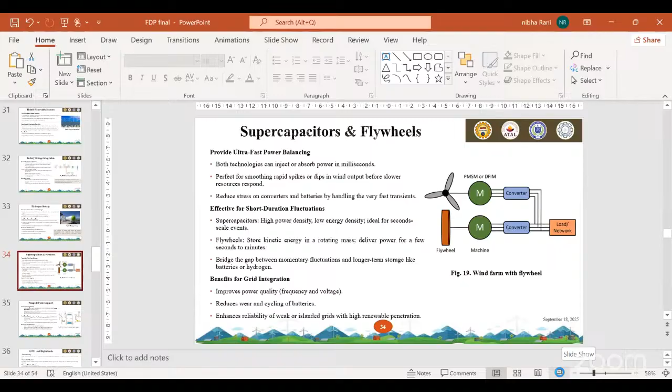Now, unlike hydrogen or batteries, which are meant for providing support for short or medium time, supercapacitors and flywheels have ultra-fast balancing capacity. Supercapacitors can deliver bursts of power within milliseconds, making them ideal for smoothing momentary fluctuations.

And flywheels, which store energy in their rotating mass, can inject or absorb power rapidly without degradation, and this could be done in cycles of 1,000 times. Together, these technologies, supercapacitors and flywheels, enhance the grid's ability to handle sudden changes in wind output, complementing the larger storage solutions and improving the resilience of the system.

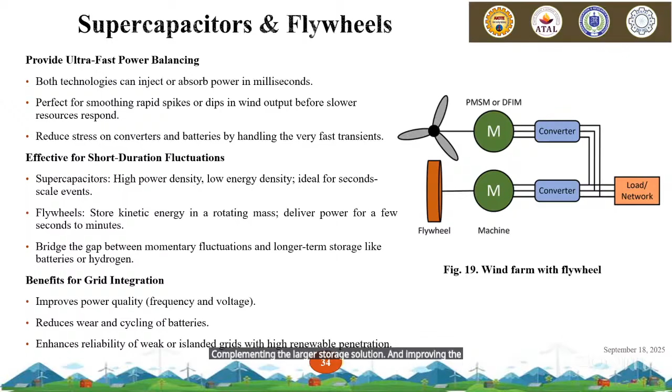Now comes pumped storage. Pumped storage remains the most mature and widely used form of large-scale energy storage. It works by pumping water uphill into the reservoir when wind generation is high, and releasing it downhill through the turbine to generate electricity when demand rises. This technology provides seasonal balancing, making it a perfect complement to variable renewables like wind.

India already has significant pumped hydro potential, which could be modernized and expanded to support a higher share of wind generation.

Now comes the second category of innovation, in which AI and digital tools have come into the picture to ease the grid integration of renewables into the system. As we all know, artificial intelligence has transformed forecasting. Nowadays, machine learning methods trained on weather data, turbine performance, and historical patterns can predict wind output with higher accuracy. And this could range from short-term to long-term forecasts.

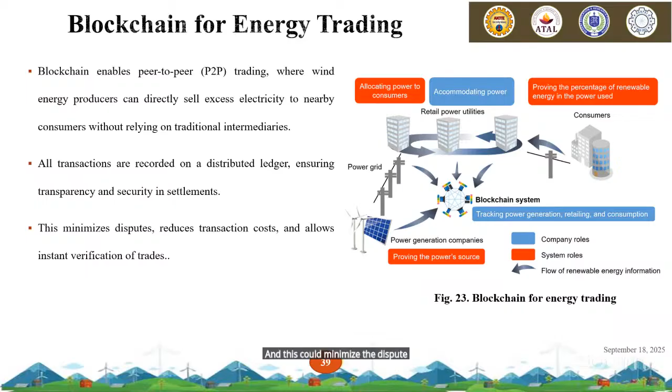In the larger market, blockchain can streamline renewable energy certificate trading, and this could minimize disputes, reduce transaction costs, and allow instant verification of trades.

Now there is another new thing. This is the digital twin grid. A digital twin grid is basically a replica of a physical system. In the case of the grid, for wind integration, a digital twin allows operators to test different scenarios such as a sudden wind drop or transmission fault without real-world instability. This helps to plan a proper protective system, train personnel, and optimize operations.

And the digital twin grid is more useful for research purposes, where you can plan expansion of the system, how the system will be, how the system will operate, and with this you can also plan your protection for cyber attacks, equipment failure, sudden fluctuations, and others. This kind of grid, supported with a twin grid, enhances the resilience of the system.

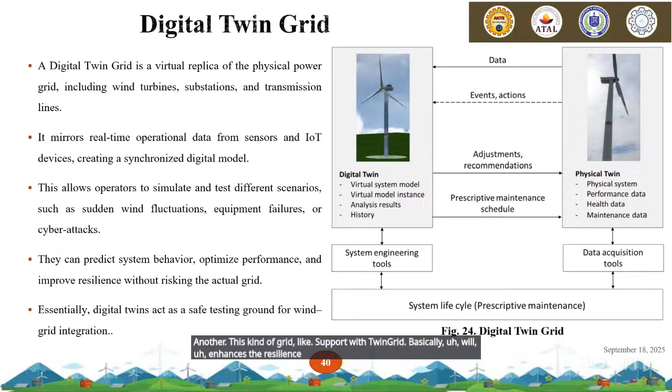Now comes offshore and HVDC integration. Offshore wind provides both opportunity as well as challenge, as offshore offers sites with stronger and steadier wind, which enhances the capacity factor compared to onshore locations, with less land use conflict. However, projects are very expensive. They require special foundations, cables, and maintenance vessels. Despite this cost, falling technology prices and policy support are the reasons for the rapid growth of this.

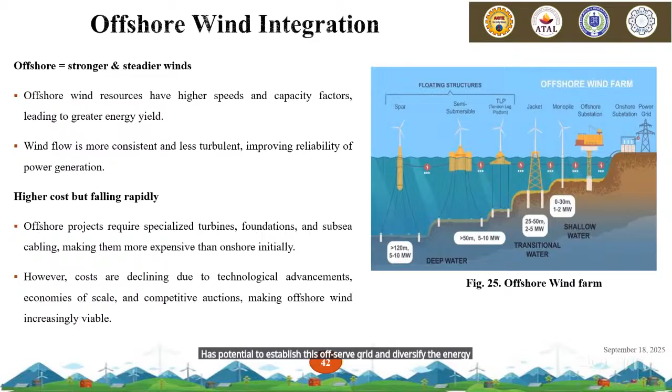When we talk about India, offshore wind in Tamil Nadu and Gujarat has potential to establish this offshore grid and diversify the energy mix, reducing the pressure on land use. Now coming to HVDC transmission. HVDC lines play a critical role in moving large amounts of wind power over long distances with minimum loss. HVDC has lower line losses and is more stable for interconnecting remote wind power with urban centers.

HVDC also offers hubs for multiple farms. Instead of connecting each wind farm individually, multiple offshore farms can be linked to a common HVDC hub. This hub reduces the infrastructure cost and enables efficient pooling of offshore wind resources before transmitting power to the shore. It also facilitates cross-border connections, creating regional offshore energy networks.

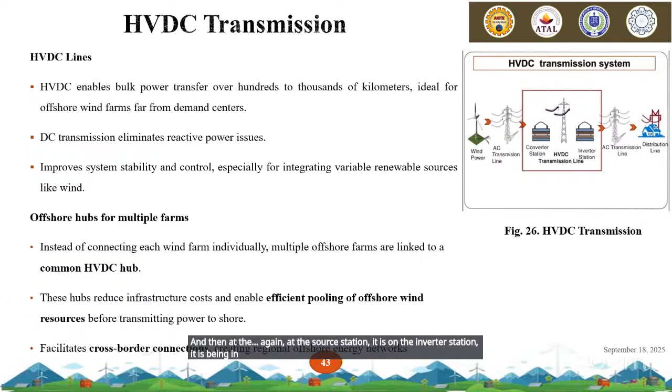This is a diagram showing how HVDC transmission works. AC supply is converted to DC at the converter station and then transmitted, and then at the inverter station it is inverted, converted again to AC, and then fed to the distribution lines.

Now comes the floating offshore wind turbine. Traditional fixed-bottom turbines are limited to shallow water, that is up to 60 meters. However, floating platforms allow wind farms to be installed in deep water locations where wind speeds are stronger and steadier. This extends the potential of wind resources, especially for countries with narrow continental shelves.

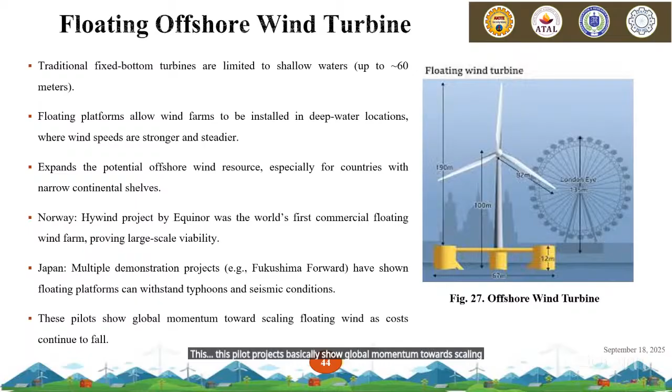Norway's Hywind project by Equinor was the world's first commercial floating wind farm, proving large-scale viability. Japan also has multiple demonstration projects that have shown how floating platforms can withstand typhoons and seismic conditions. These pilot projects show global momentum towards scaling floating wind as costs continue to fall.

Now coming to policy and regulation needs. Effective policies are crucial for wind integration.

Effective policies are crucial for wind integration, such as tariff support. Guaranteed grid access ensures the wind... The grid must evolve: the requirement of modern turbines is to provide grid support services like inertia and reactive power.

By aligning with such infrastructure and interconnection, it raises the wind capacity. Also, market reform should be added so that supply curtailment, like wind supply curtailment, could be reduced, and revenue could be earned from this. Some examples of this:

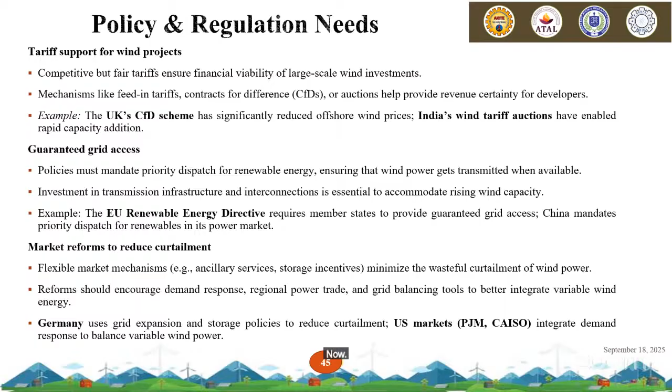Now, after some policies, we'll go to case studies of different countries. Coming to the Denmark case study, 50% of electricity is generated from wind. It generates half of its annual electricity consumption from onshore and offshore wind, and strong government support, early adoption, and continuous investment in offshore wind helped it become a global leader in wind integration.

Apart from this, Denmark's electricity is balanced with Nordic hydropower imports from Norway and Sweden. And this again emphasizes cross-border energy cooperation.

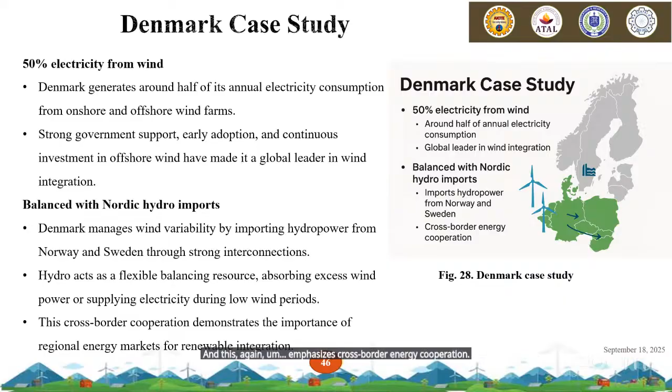Contract for Difference has significantly reduced the levelized cost of offshore wind, making it competitive with fossil fuels. And this scheme has created a predictable market environment, encouraging both domestic and international investment.

Now coming to China's mega projects. China has been a giant producer of wind energy. China has developed massive onshore wind bases in the regions of Inner Mongolia and Gansu. Large-scale offshore projects are being expanded rapidly along the eastern coast, supporting the urban demand centers. This mega project highlights China's strategy of concentrated renewable clusters for economies of scale.

Further, China's renewable energy integration has been intensified due to its other project, the ultra high voltage DC lines. China uses ultra high voltage DC transmission lines to carry huge amounts of power from remote bases to distant load centers. And this is the upcoming project.

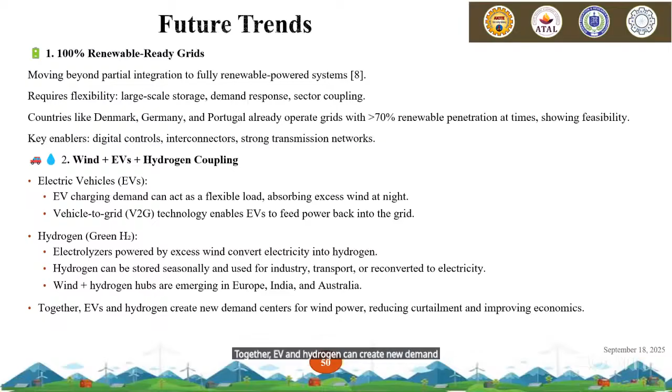With hydrogen coupling, electrolyzers powered by excess wind convert electricity into hydrogen. Hydrogen can be stored seasonally and used for transport or reconverted to electricity. Wind plus hydrogen hubs are emerging in Europe, India, and Australia. Together, EV and hydrogen can create new demand centers for wind power, reducing the curtailment and improving economics.

Now coming to the next, that is smart grid with AI and IoT. Artificial intelligence can improve short-term and ultra-short-term wind forecasting, which will further optimize the real-time dispatch and congestion management. It also enables the predictive maintenance of turbines, reducing the downtime.

With IoT, thousands of sensors on turbines, transformers, and substations provide live grid health data, and it facilitates self-healing grids that reroute the power during any kind of fault. And the digital twin model is basically a virtual model of the grid and wind farm that allows the operator to test scenarios and reduce risk when integrating a higher share of wind energy. This is what we have dealt with now.

Now coming to the conclusion from the entire discussion, it has been seen that wind integration is essential for achieving net zero targets, and innovation in converters, storage, AI, and HVDC is making this stable integration possible. Global collaboration among policymakers, industry, and researchers is critical for success. This entire PPT has been made with these references.